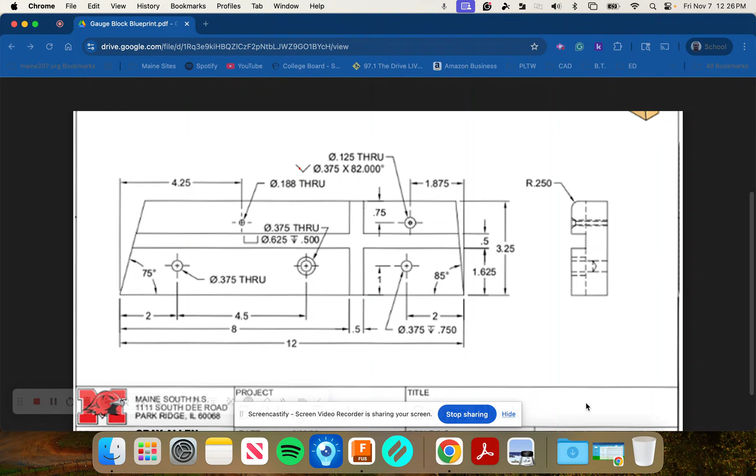Alright, Hawks, welcome back. In this video, we should be looking at filling in a few more holes.

So leaving off from our last project update, we did one hole here located in our block. We've got 4 more to put in. Alright, so let's start talking about how to add those in. So, first item of business is we need to locate these holes. Now, as talked about in the previous video, we need to either use one sketch to locate all the hole centers, or we can do individual sketches.

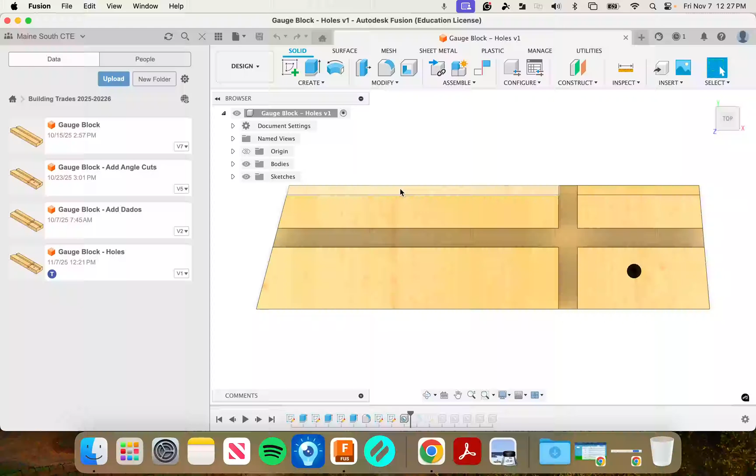So let's start with this one over here that's 2 inches from the left corner, and it's an inch up and aligned horizontally with this first hole. So previously I have come into my Fusion, I've opened up my block, I've now made a new one. I did a file, save as, and I created another version. You may be working in the same one. That's perfectly acceptable.

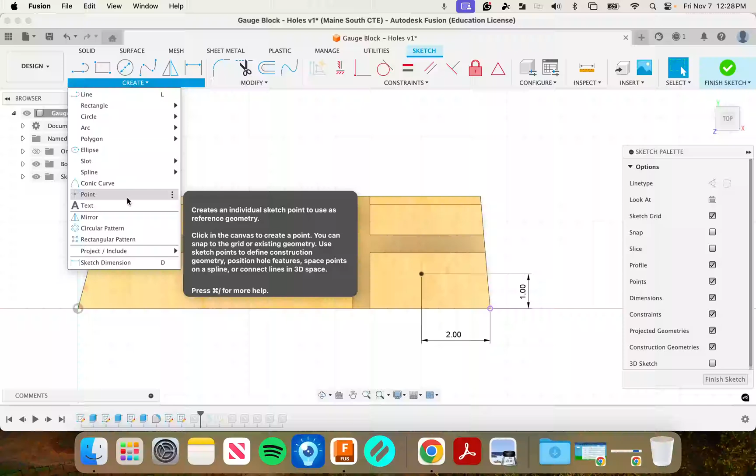So on my existing model, we can see that there is a sketch here. And if I take a look at that sketch, you can see that on this sketch, this is where I located that particular hole. Okay, so I can either utilize this sketch and add more points, or I can add a new sketch to the same surface and locate the center point on that separate sketch.

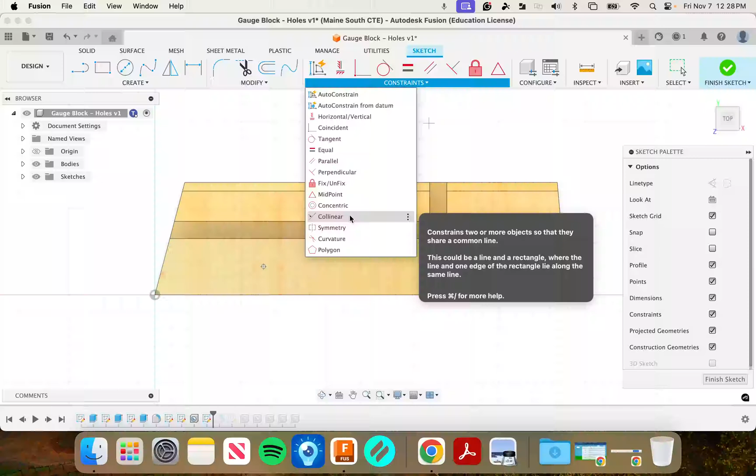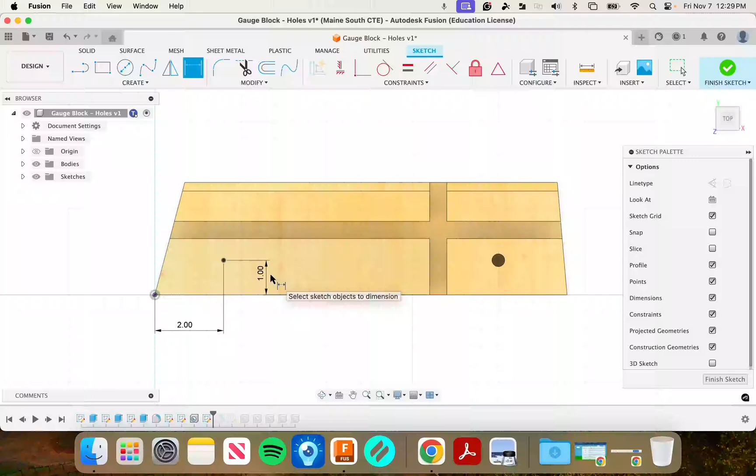Okay, so the benefit to working on the same sketch is I can use constraints like a horizontal constraint or a collinear, where is it? There it is, collinear constraint. So I can utilize a dimension already identified in another sketch easier. Or I can simply just add in my dimensions. I believe we were going to be 2 over and 1 up. And I'll put that point where it needs to be. I'll finish the sketch, and then I'll work on putting in a hole on that identified point.

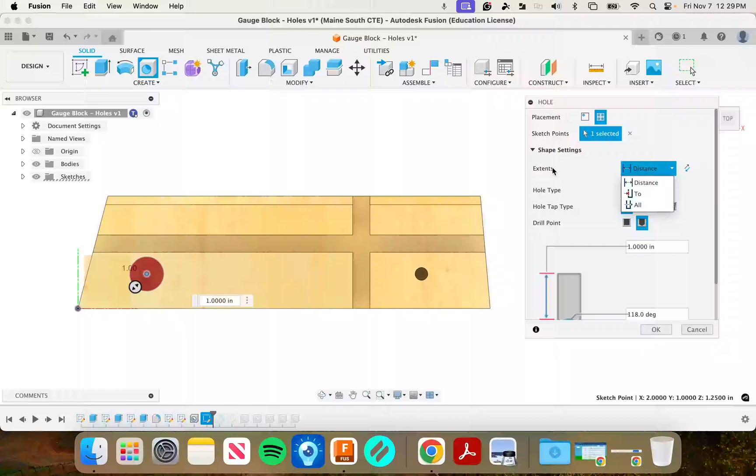So this is where we need to go back and forth. And it looks like this is a 0.375, which is 3/8 through hole. So let's go back and take a look. We have our hole interface. We're going to potentially change extents to all because we want this to go through the object regardless of how thick it is. Okay, and then we have the type of hole. It's a simple hole, and I need a diameter, which is 0.375. And if I enter, there is my hole going all the way through.

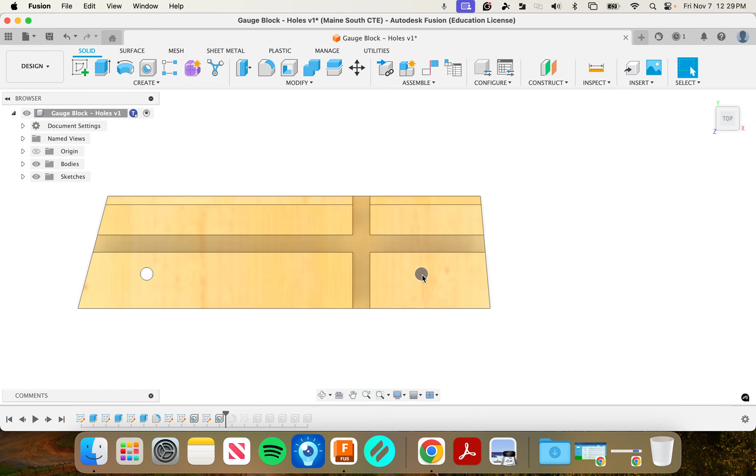Notice that I can see through. The previous hole we did is a hole that has a depth to it, so it did not go all the way through, which is why that one looks like it's black, because we can't see down inside of that hole. All right, next one. We have a counter bore hole here, and I'm going to do that one next.

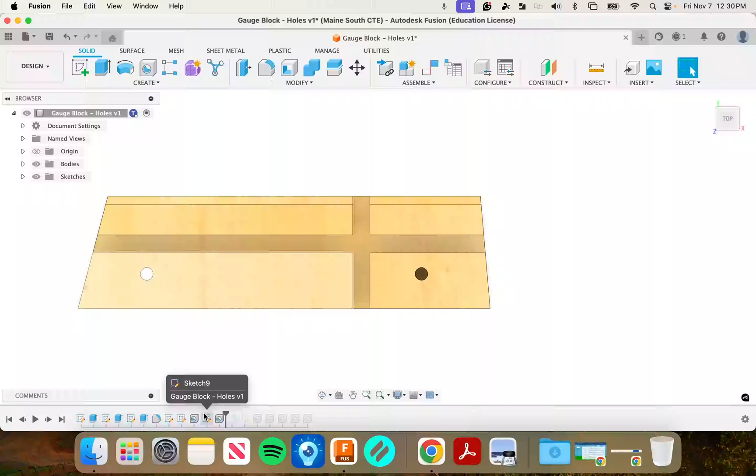To keep things a little bit interesting, I am going to reutilize the sketch that I just used to place in this hole. So I'm going to go back to a sketch here in my timeline, and I'm going to double left click on it, and that'll open it back up. So I can add stuff to the sketch. Sometimes those sketches, when I use them, they get turned off. So I can always go back and turn a sketch on or off if I want to see that sketch.

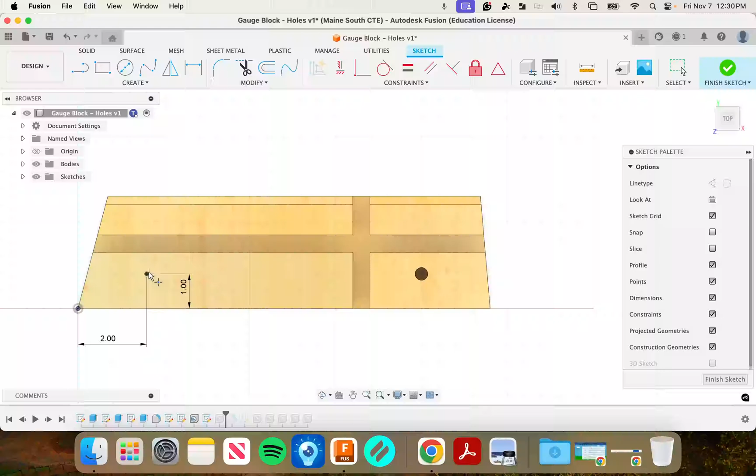So let's do another point. And this time I'm going to kind of let Fusion maybe see that point. And if I drag out here, you see, and it might be hard to see on our screen, but it's trying to say, hey, did you want to align those two right there with that blue line? I'm going to left click on that, and that will hopefully not allow me to move this point up or down. And it did not constrain that, and that's okay.

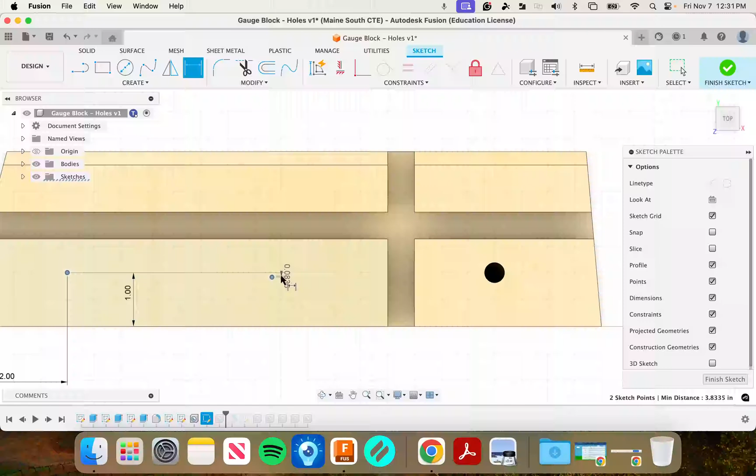So I could come back in with a dimension. I'm going to do a dimension from side to side here. And that is supposed to be what? Let's check. 4.5. Oh, wrong stuff.

That will locate the hole left to right. Now, I could certainly come in and do another dimension to locate the hole vertically.

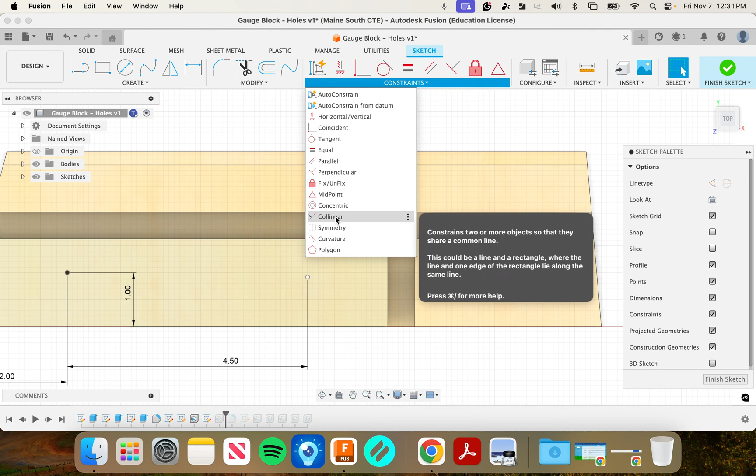However, let's try a constraint instead. This is a bit more advanced. I'm going to use a collinear constraint, which allows me to share a common line. So I want this point and that point to be horizontal, or collinear. It doesn't seem to be liking that.

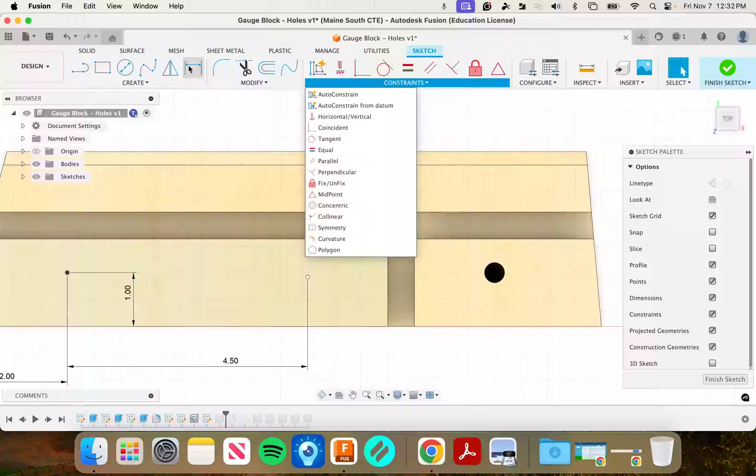Let's try another one, a horizontal constraint. It doesn't seem to want to do that either. Not sure what's going on, but one of those two should have worked, the horizontal or the collinear. Since that's not working for me right now, I'm going to go back to the old bag of tricks.

I'm just going to put in a dimension so it's located in the correct location. The important part is that it is fully constrained when it's no longer blue or white. It would be black, indicating that it's not movable without changing a dimension. So I'm going to finish this sketch, and let's put in that counterbore.

Now you'll notice when I finish that sketch, that point disappears. That's because we previously created a hole out of that sketch. So I'm going to go to my browser, expand the sketches, and go down to sketch 9. I'll turn it on so it's visible, and now we can see that point.

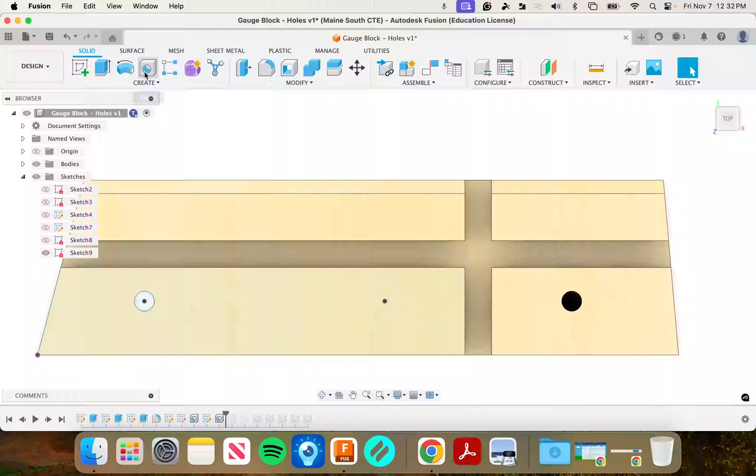We're going to grab the hole command, come down to that new point, and select a counterbore hole. I'm going to rotate this a bit so we can see what's going on easier. Let's go back and look at our example. We've got a counterbore, which is this U-shaped area, with a diameter of 0.625 and a depth of 0.5. Let's start with that.

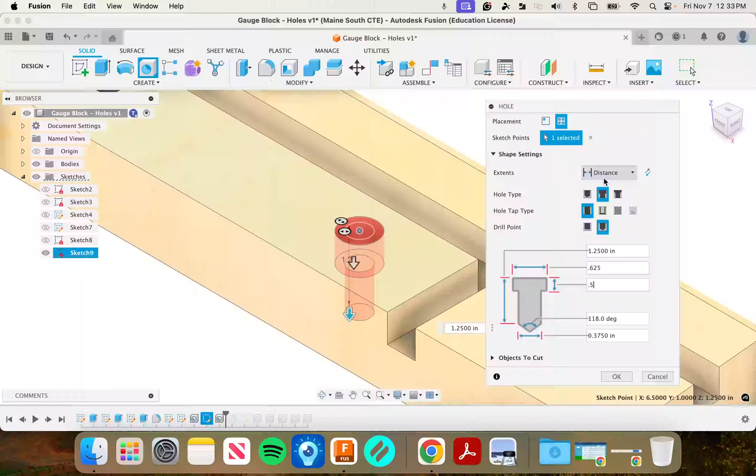Here's our counterbore information. We see the diameter of the counterbore should be 0.625, and our depth of the counterbore should be 0.5. Now the next thing I need to worry about is the extent of my hole, and I believe this one goes through all. So I'm going to turn on all, which gets rid of our depth for the smaller hole.

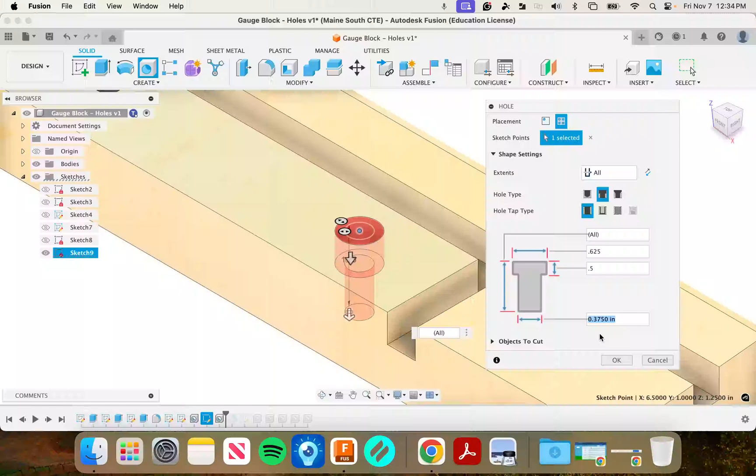Let's go back and take a look. That other hole is 0.375, and it goes all the way through. So I'm just going to select the distance or diameter, 0.375. Looks like that was already filled in for me, but if it wasn't, I could adjust it. And when I say OK, I should now have a counterbore hole.

That would allow me to put a washer in there, or the head of a bolt or something like that, to keep it below the surface of the object. If I'm working around, maybe I want to save this along the way, and feel free to do that. Maybe I'll call it C-bore, for counterbore hole, I don't know.

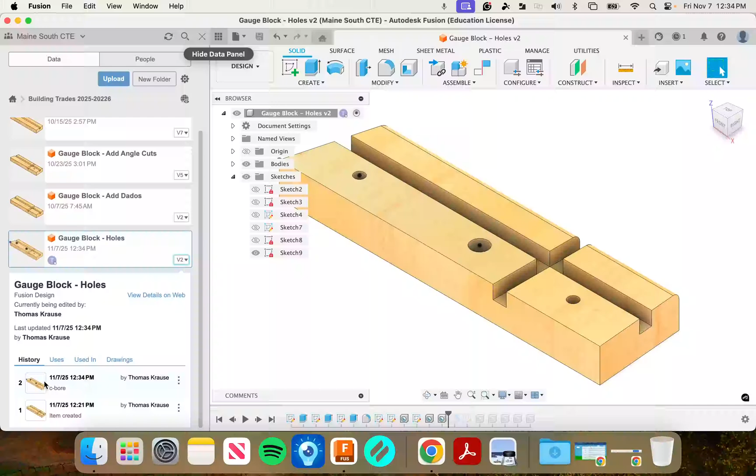That way when I go and see it in my data panel, you'll see I've got this holes. If I go down here to V2, you'll see I just created... should be counterbore, should be a number there. Oh, there it is right there, C-bore. So it's got a name to it rather than just being a random number.

We've got 2 more holes to put in. Let's orient this, and I'll do a new sketch. Maybe we'll put both of these new hole sketches on this new sketch. Again, there's not a right or wrong way to get there, sometimes there's a more efficient way, but understanding what you're doing is half the battle here.

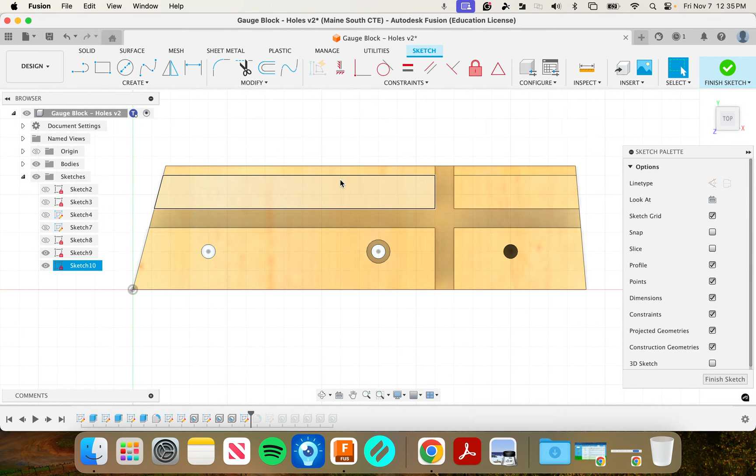Let's take a look at our example. I seem to have 1, 2 — it looks like they are 3/4 of an inch from the top edge. So let's put in 2 points. Back in Fusion, I'm going to do this on my sketch. I'll get a point tool and put one here and one here. And while I'm at it, I notice I'm not seeing this top edge.

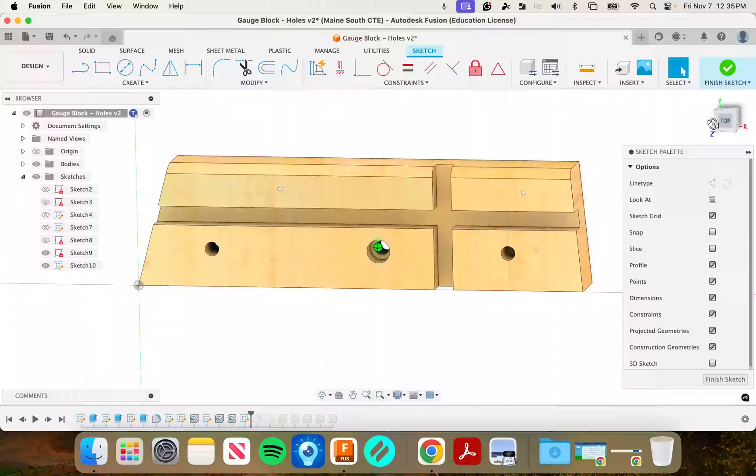Let's take a moment and look at that. Why am I not seeing that top edge? Because there's a fillet there. So I'm seeing this edge, but not the top edge, which is where the end of the object is. Let's review — we can go back into Create, find Project/Include, and I want to project that top edge and that top edge. Let's say OK, and now I should be able to get that top edge to that point.

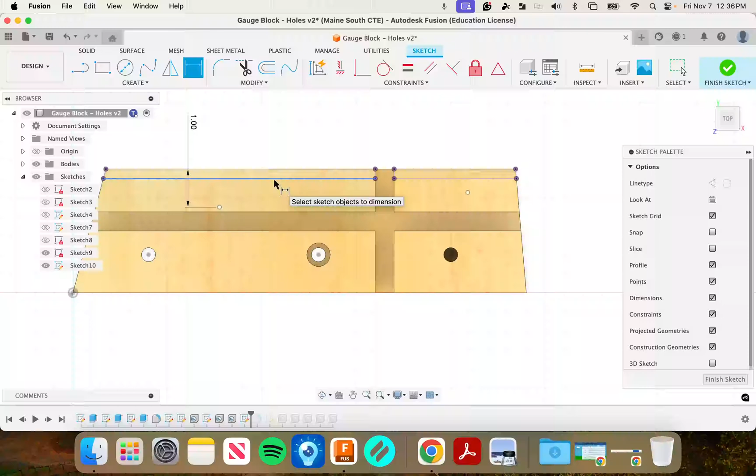That was supposed to be 1. Okay, 1 — let's double check that because that looks big. Was I right with 1?

0.75. All right, there we go, 0.75. So let's go back in and change that. 0.75, that looks a little bit more realistic.

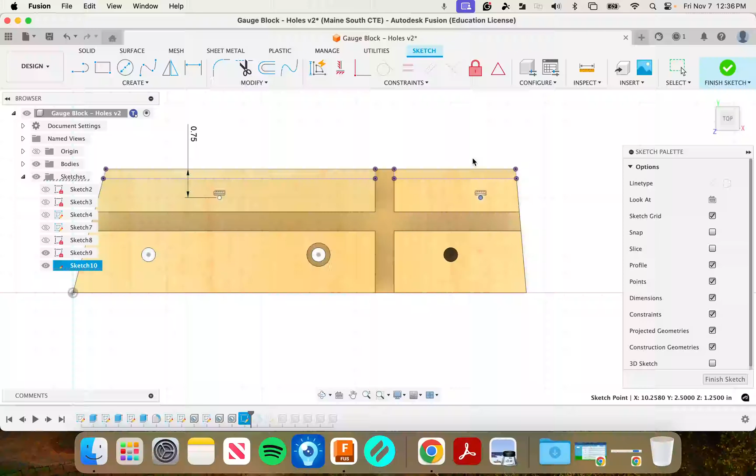And while I'm in here on this sketch, I'm going to do a horizontal constraint. Let's see if it'll work on this for me this time. There we go, so I see those two symbols that showed up. That's telling me that there is a constraint, and that constraint image will depend on what type of constraint I may have applied. So I've got a horizontal constraint on both of those, so it should not allow me to move that dot up or down, but you can see it's free to move left and right.

All right, and I need a couple other dimensions to locate this. So it looks like I got 4.25 from the left edge, so let's do that one next. Dimension from that point there to this point here, 4.25. And notice it is now a solid black dot until I try to highlight it.

And our second one looks like 1.875 from the right edge. So dimension from this edge to that point, 1.875. Is that what I said? Losing my mind over here, everybody. 1.875, yes I am.

Okay, so I've got and located those two points. I'm going to finish that sketch. And now I want to work on making these additional holes. It doesn't matter which one I start with, so I'm going to select the one on the left.

Let's go take a look at our drawing sheet. That is a 0.188 through hole, that's basically about 3/16 of an inch. 0.1875 is 3/16 of an inch, I believe. 0.125 is an eighth. So we're going to put a diameter of 0.188 and a through hole there for our small one, so let's go do that.

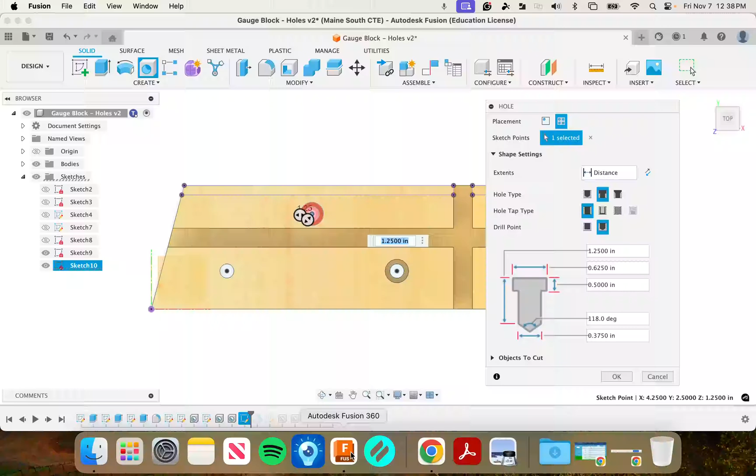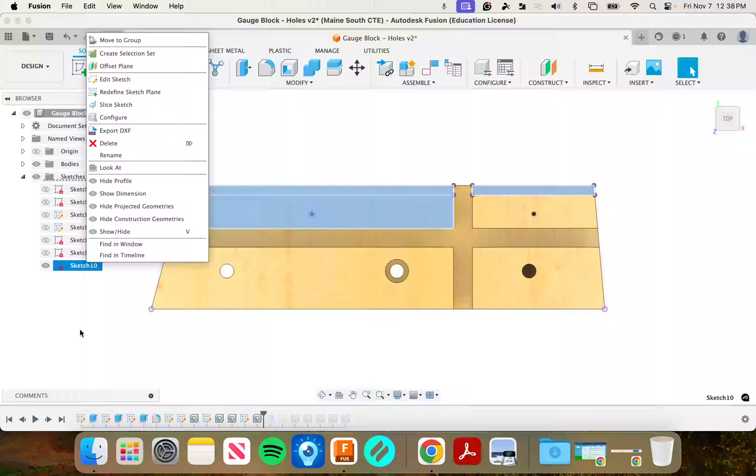So it's going to be an all hole, simple, 0.188. Okay, there is that hole. And notice when I did that, the sketch went away because I kind of consumed it to make that hole. It's not gone though, I'm just going to turn it back on. There's my point. So again, I could rename these, I could right-click on these and name them so they made sense, or I can just kind of work my way through seeing what it highlights or turns on.

But I'm going to get the hole function again, and let's do another hole. That's going to be this one over here, and this is supposed to be a countersink. This would be for like the head of a screw, not a bolt. Okay, countersink, let's see, let's go check our drawing. Does look like it goes all the way through as 0.125, so that's an eighth.

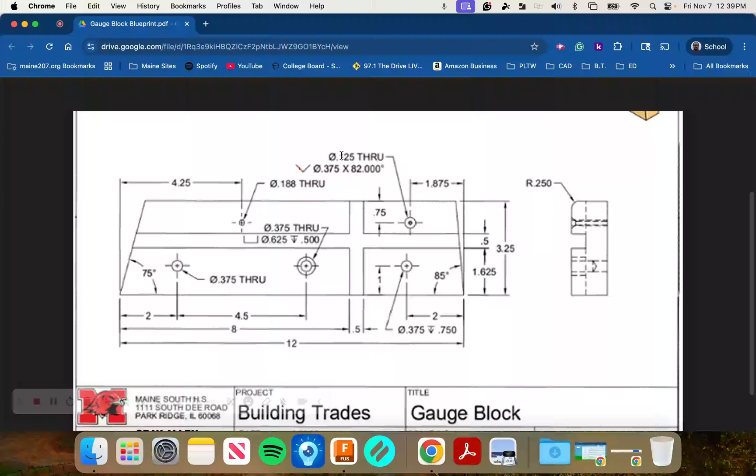I guess I probably should think this is probably 0.1875, which is 3/16, not 1/16. Okay, just came into my head there. So a 0.125 through hole with a counter bore, a countersink of 0.375, diameter of our countersink 0.375. The angle should stay the same, and the other one is 0.375.

Let's double check that because maybe I'm wrong. Yeah, 0.125, all right, 0.125. So I've got a depth which should be all 0.375 for the countersink diameter, 0.125 for the through hole.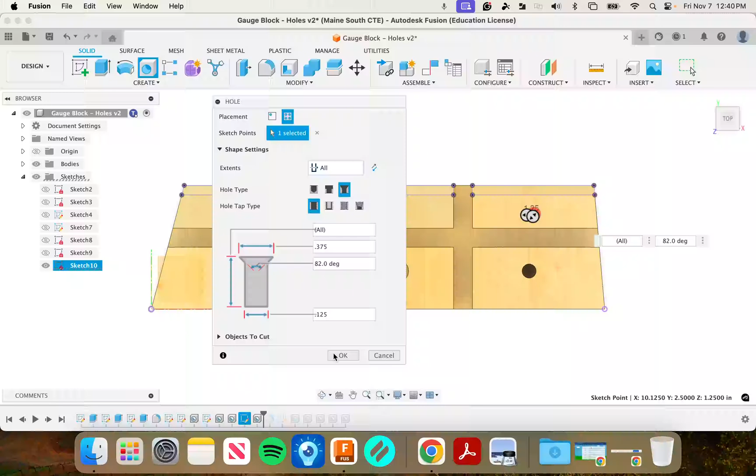When I say OK, I now should see - let's go to the 3D view there, and let's turn off this other sketch. And you can see that that's got a taper, like a cone, if you will, as opposed to this being the counter bore. So again, counter bore for like a head of a bolt or a nut or something like that, and this one might be like a screw head.

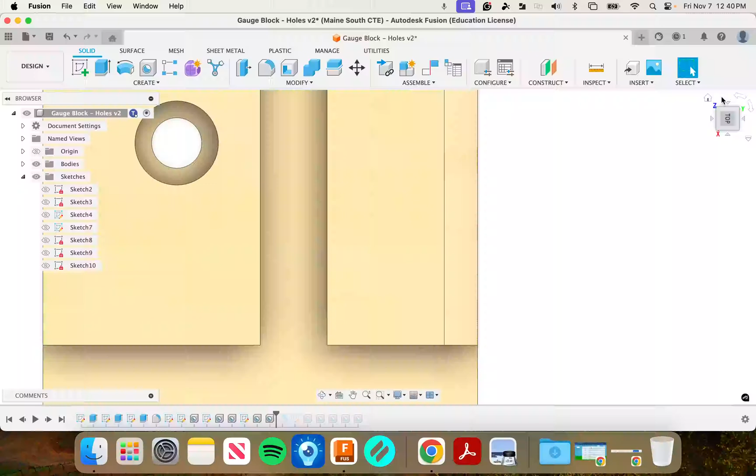All right, so if you've been following along successfully, we should now have a block that is the correct size, length, width, and height. We have a filleted edge, which we'll be making with a router. We've got a couple of dados, and now we have 5 holes. And our goal at the end of this is to be creating this physically out in the lab. Catch you on the next video where we're going to set up a drawing sheet.